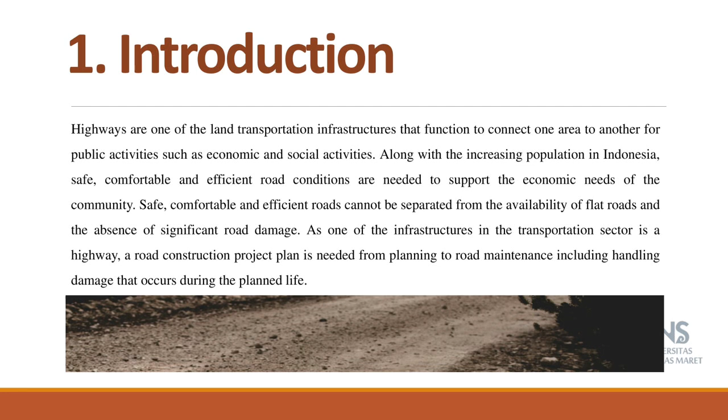As one of the infrastructure in the transportation sector is a highway, a road construction project plan is needed from planning to road maintenance, including handling damage that occurs during the planned life. A damaged road, if not immediately handled, will cause more severe damage. This makes the repair cost that must be incurred become greater. In order for the road section to have safe, comfortable, and efficient service capabilities, it is necessary to have a life cycle cost analysis of the highway.

Life cycle cost analysis is a form of economic analysis that compares the cost of various alternatives over the life cycle of a building. LCCA takes into account the total cost from design, construction, operation, maintenance to disposal of a building. This research used a case study on national road in Central Java by highlighting the growth and increase in road traffic, which is the cause of damage to several road sections such as the Simpang 3 Lingkar Kudus Timur Road section, the Demak Ring Road section, the Pati Ring Road section, and can be seen in figure 1,

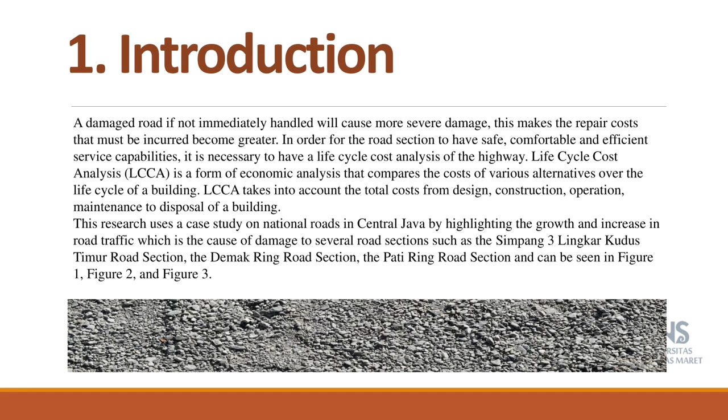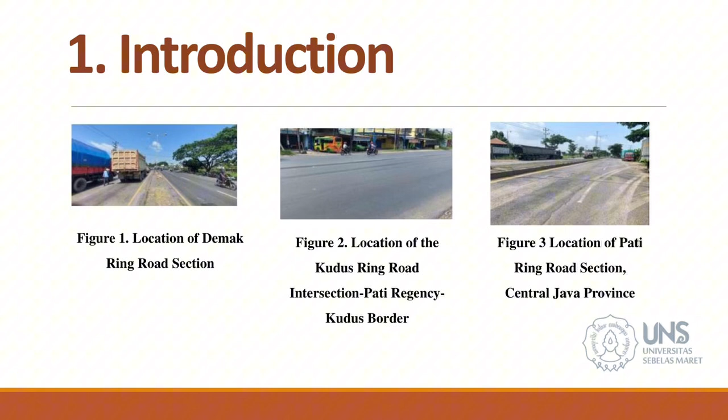figure 2, figure 3. This is figure 1 for location of the Demak Ring Road section, and then figure 2 for location of the Kudus Ring Road intersection, Pati Regency, Kudus border, and then figure 3 for location of Pati Ring Road section, Central Java province. The location selection in this study used 3 different road sections, namely Simpang 3 Lingkar Kudus Timur Road section, Demak Ring Road section, and Pati Ring Road section.

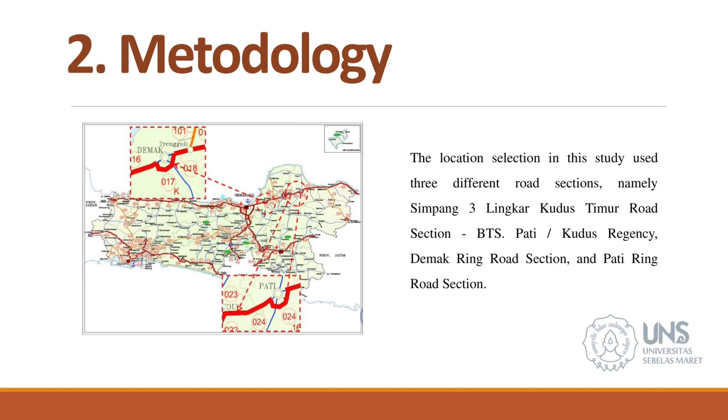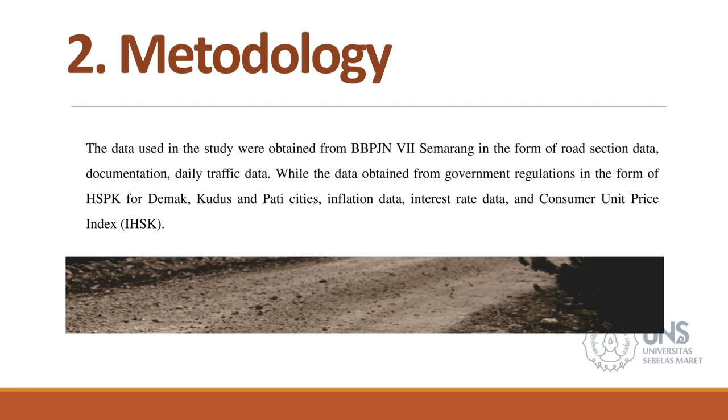The data used in the study were obtained from BBPJN VII Semarang in the form of road section data, documentation, daily traffic data, while the data obtained from government regulation in the form of HSPK for Demak, Kudus, and Pati cities, inflation data, interest rate data, and consumer unit price index.

This research consists of several stages. The first thing to do is to conduct a literature study, namely to deepen the understanding of the literature that can be obtained from several sources, such as theory books, journal, thesis, dissertation, and others. After conducting a literature study, you can start by identifying the problem followed by a literature review as needed. After determining the literature review as needed, then determine the road section to be reviewed by considering whether the road is being or has been maintained or not.

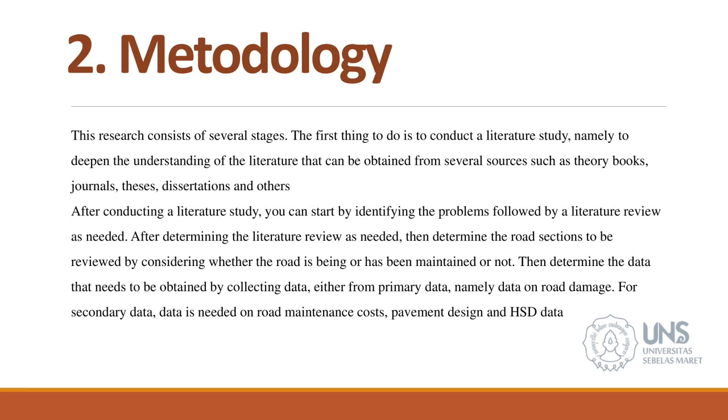Then determine the data that needs to be obtained by collecting data, either from primary data, namely data on road damage. For secondary data, data is needed on road maintenance cost, pavement design, and HSD data. After that, based on the data obtained, according to the Federal Highway Administration, the steps involved in life cycle cost analysis include determining alternative pavement design strategies for the analysis period, determining the performance period and activity time, estimating agency cost, estimating user cost, developing an expenditure flow diagram, calculating the net present value, analyzing the result, and re-evaluating the design strategy.

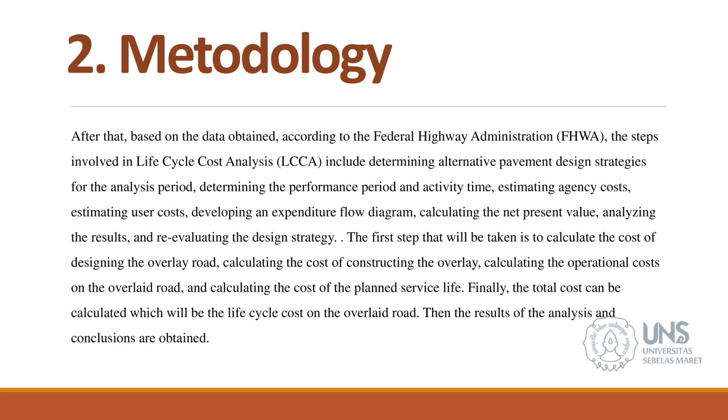The first step that will be taken is to calculate the cost of designing the overlay road, calculating the cost of construction of the overlay, calculating the operational cost on the overlay road, and calculating the cost of the planned service life. Finally, the total cost can be calculated, which will be the life cycle cost on the overlay road. Then the result of the analysis and conclusion are obtained.

This is the result for agency cost. The stages of agency cost estimation are determining the quantity or unit price of construction and maintenance. The calculation of this cost includes labor, material, equipment, overhead, and profit with unit price based on local unit price reference for the area. The unit price analysis in this study refers to the regulation of the Minister of Public Works and Public Housing of the Republic of Indonesia number 8 of 2023 concerning guidelines for compiling construction work cost estimate. Through economic analysis, all types of costs are presented in the form of present value.

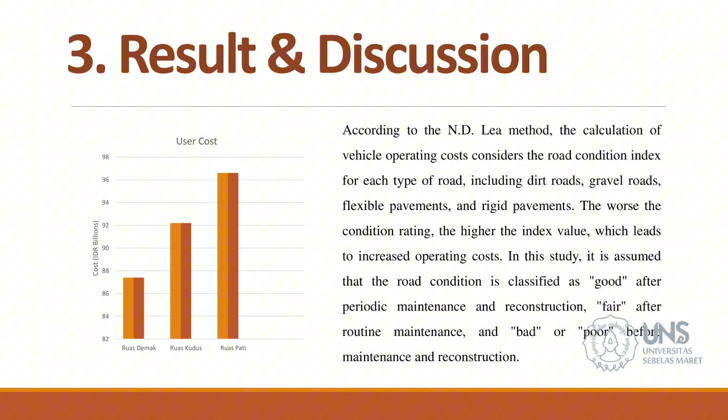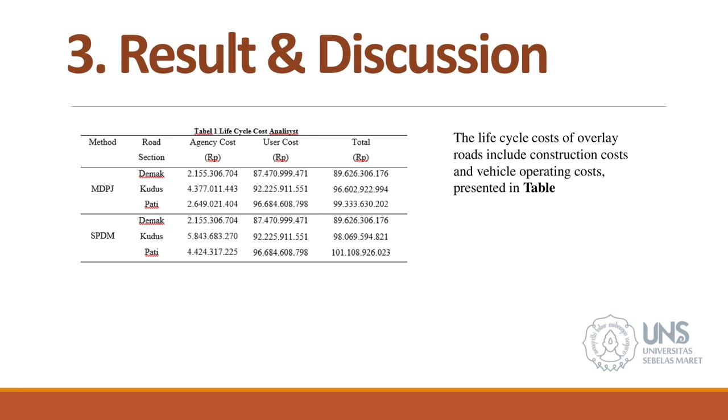Based on the diagram, according to the N.D. Lea method, the calculation of vehicle operation cost considers the road condition index for each type of road, including dirt road, gravel road, flexible pavement, and rigid pavement. The worse the condition rating, the higher the index value, which leads to increased operating costs. In this study, it is assumed that the road condition is classified as good after periodic maintenance and reconstruction, fair after routine maintenance, and bad or poor before maintenance and reconstruction. The life cycle cost of overlay road includes construction cost and vehicle operation cost presented in the table.

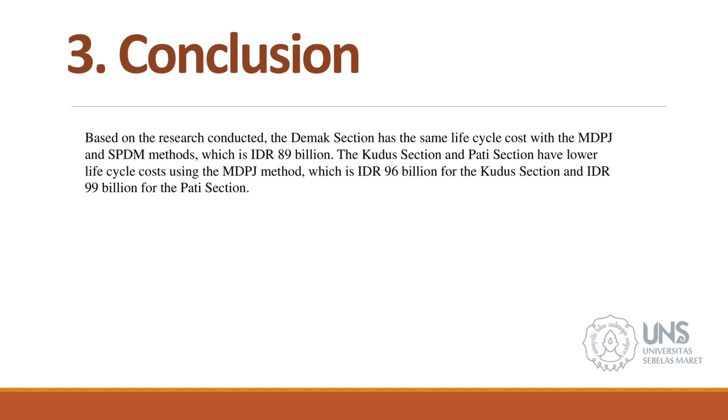For the conclusion, based on the research conducted, the Demak section has the same life cycle cost with the MDPJ and SPDM method, which is 89 billion. The Kudus section and Pati section have lower life cycle cost using the MDPJ method, which is 96 billion for the Kudus section and 99 billion for the Pati section.